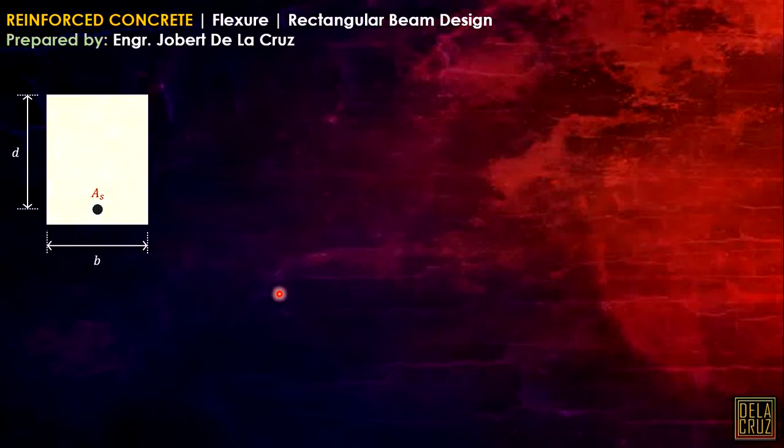Okay, so slight recap. We have this beam, we have this effective depth, and we have the beam dimension B, and we have this area of steel bars here. So what's the principle here? The beam will be having an effective compression block, this one, and the portion below this is the tensile part of the beam.

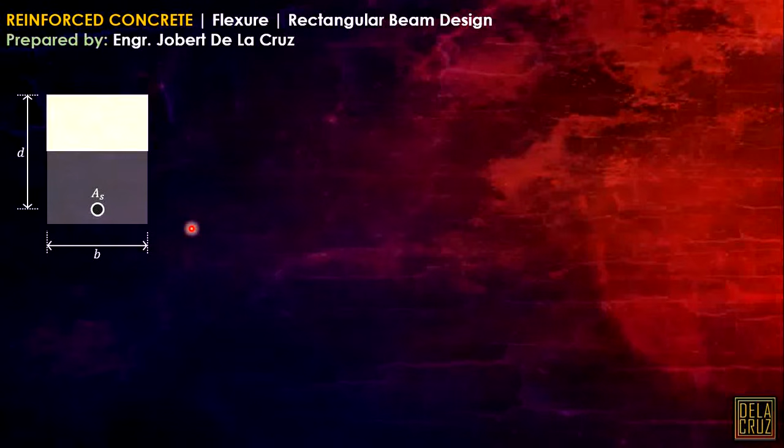And we know that the concrete is weak in tension and strong in compression. So in the code, it's assumed that the tension side of the beam is neglected in designing. This is what's stated in the code. So looking at this at the longitudinal view.

We cut here, and according to the code, this is A, the depth of the compression block, and we have this depth that is the depth of the neutral axis from the extreme compression fiber, and these are the notations we will be using. Of course, this is from the code.

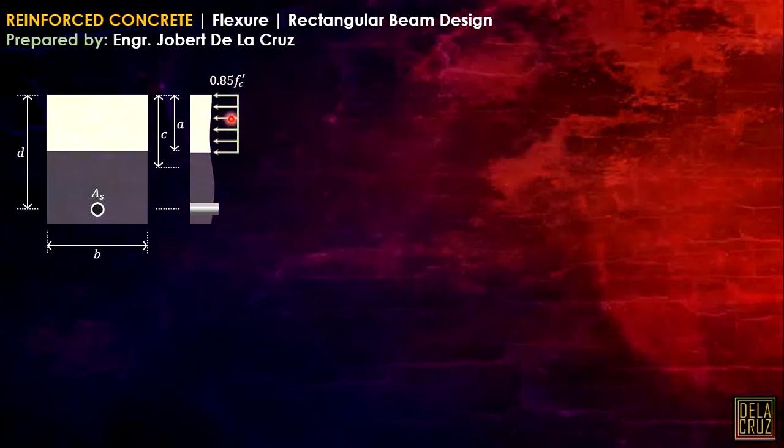The code also says that the effective stress in the compression block is 0.85 of Fc prime. And of course, if we have a stress, we will be having a resultant force here, and that is just stress times area. Let's denote that as C, the compression of the concrete. That is the force, the force is equal to stress times area.

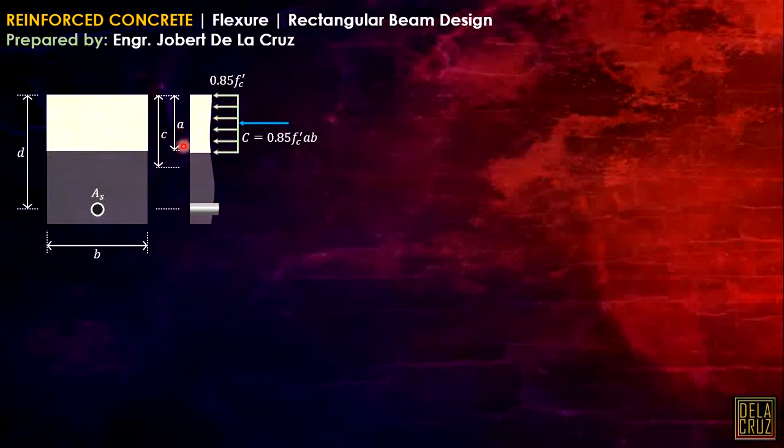Take note that our stress here is 0.85, and our area here is this one, the compression block, that is A times B. This is our compression block, so this is our effective area there.

Now, to account for this, this accounts for the tension bar here, the same thing applies. We will denote this as T, and take note that is the force, and again that is stress, Fs times area. For steel, we call the stress Fs, times the area of the steel bar.

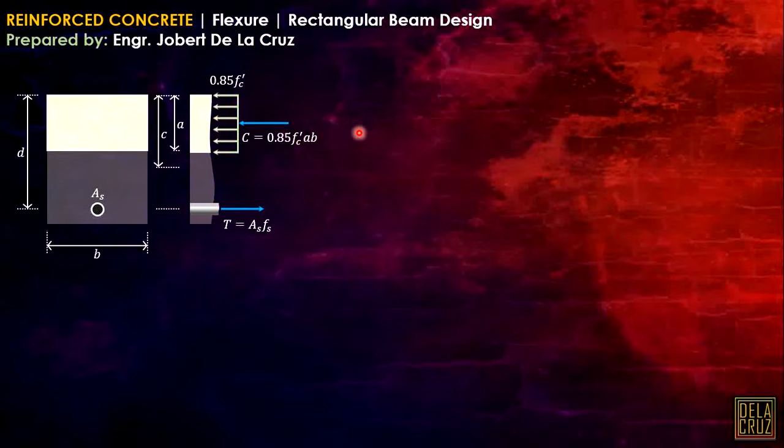So this one, C and T should be equal to maintain equilibrium. Okay, now, let's have this one.

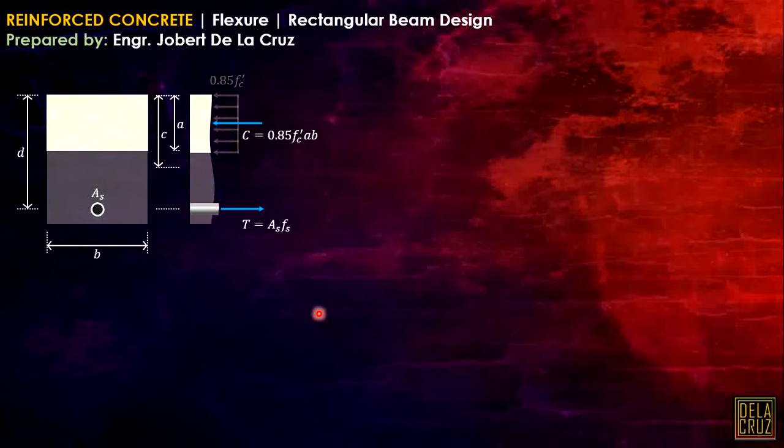So what's our main objective in designing a beam for flexure? Take note, this is A over 2, because our resultant force here, considering that this is a rectangular stress or uniformly distributed stress, this resultant force will act at the center here, of course.

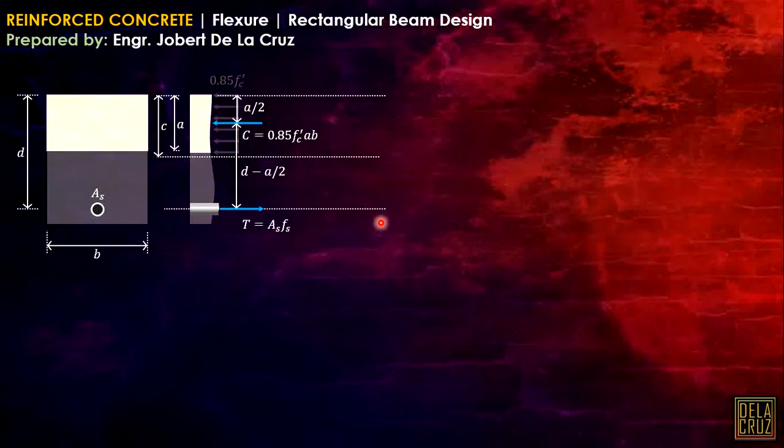Now let's do the strain diagram. These are the basics and fundamentals we need to know so we don't get lost in concrete design. We don't need to memorize formulas. According to the code, the maximum strain in the concrete is assumed to be 0.003.

And let's call that epsilon T, the strain of the steel bars, the tension steel bar. This is what's used in the NSCP code, epsilon T. And take note that strain is equal to

stress over the Young's modulus of elasticity. This is from Hooke's law. From Hooke's law, stress is equal to E times strain. So we just rearrange this to become like this.

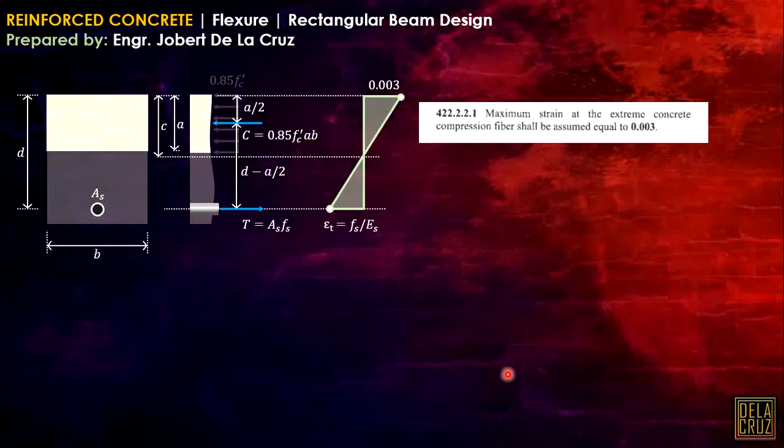That's its capacity. So by ratio and proportion, cutting this, using this strain diagram, take note that this is C, that is just this, and what remains here is, of course, D minus C. Again, by ratio and proportion, and using Young's modulus of elasticity of steel as 200,000 megapascal, we have this: 0.003 is to C as epsilon T, or that is Fs over Es.

Okay, epsilon T over Fs. So diretso ko na lang dito sa ibaba, divided by D minus C. Okay, so that's why we can derive the formula dito for the Fs. This is just the relationship between the stress of the steel and the stress in the concrete, or the strain of the steel and the strain of the concrete.

Ito yung formula na pinaka importante, no? Hindi naman pinaka importante, but basic talaga dapat na at least ma-memorize natin. Okay, so after this, in strength design, Fs should not be greater than Fy. Kasi kung gagamitin natin yung sumobra sa Fy, meaning mag-yield na yung steel natin.

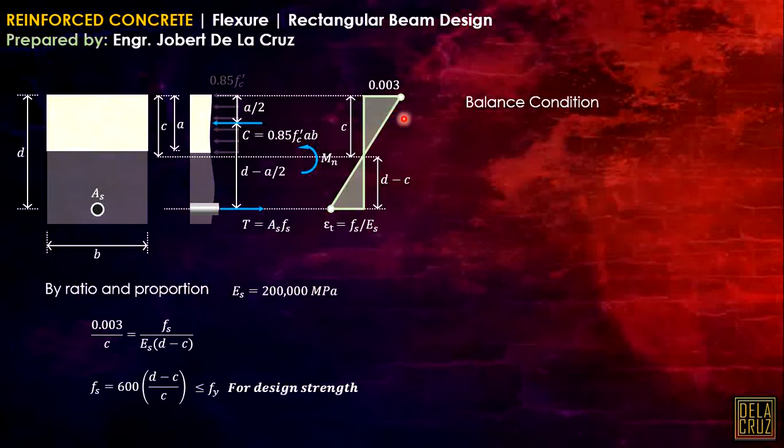Now, let's have balance condition naman. Ano yung principle ng balance condition? So ganito yan. Sa balance condition kasi, dapat yung concrete and yung steel, sabay silang mag-yield. Kumbaga, sabay silang aabot sa pinaka-yielding point nila. Yan yung principle dito. So the same pa rin, gagamitin natin to, yung strain diagram.

Okay, take note, no? The same, ito. So by equating, by using ratio and proportion, we can derive this formula. That is 600D over 600 plus Fy. This is just from this ratio and proportion, as you can see. Cross multiply this. Basta you can go on that lang. Basta this is from this strain diagram.

And using this strain diagram, dapat yung Fs mo is Fy. Kasi nga, balance condition, dapat umabot silang dalawa sa yielding point nila. So this will be Fy dito in balance condition. And you can derive this formula.

Okay, now, balance steel ratio for rectangular section. Again, this is for rectangular cross section. So deriving the formula, the same, we will equate the compression and tension. Ito pa rin yun: 0.85, but we will denote A here as A sub B or A balance. And equate this to AS Fy na. Since balance man, dapat mag-yield yung concrete and mag-yield yung steel natin.

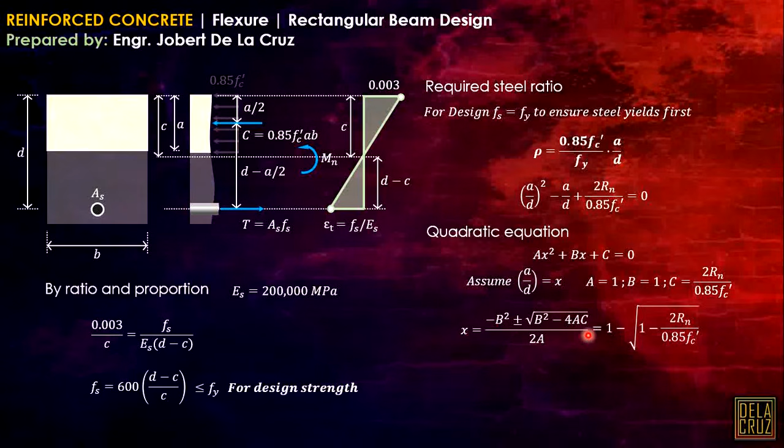Take note that we assumed x as A over D, so this whole term here is just A over D. Then we substitute this in, and it gives us this formula.

The required steel ratio when designing a rectangular beam. So as you can see, we derived rho balanced and the required steel ratio from the rectangular section only. So don't misinterpret this — this is only for rectangular cross section.

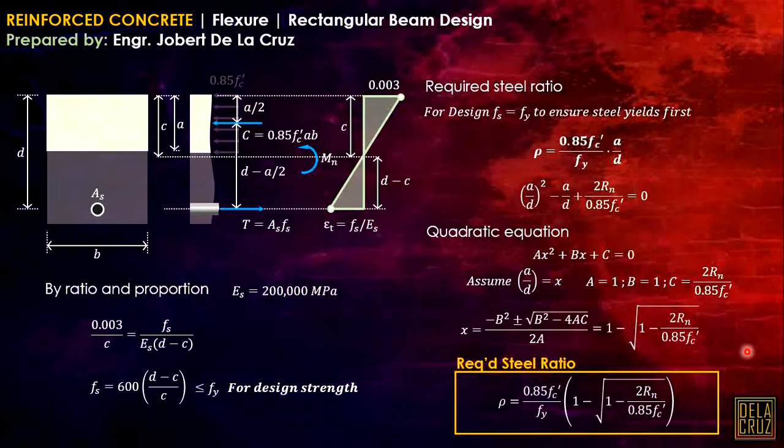Now let's have the boundary for singly and doubly reinforced condition. So first, if designing a beam, we have the factored moment.

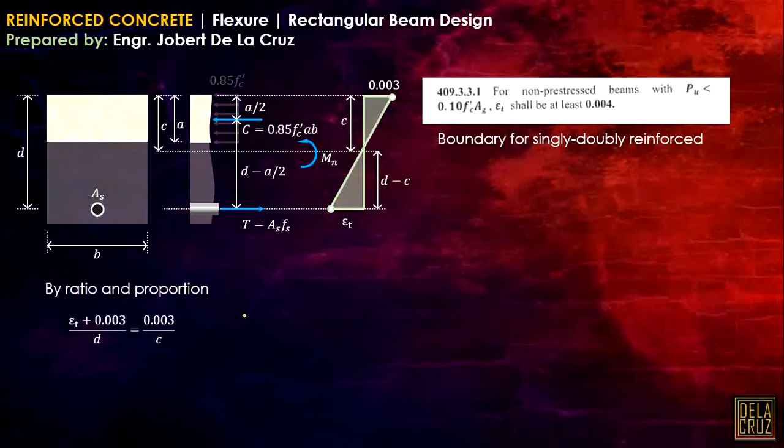Can you see that? The big triangle, this one.

Okay, this one, the whole triangle, that is epsilon t plus 0.003 is to the total depth. Take note, this is the total depth. That equals 0.003, considering this small triangle, 0.003 is to the C. Now we can rearrange this, expressing epsilon t into D and C.

Just rearranging the algebra. Now, using this code, it says that epsilon t should not be lesser than 0.004, or we can mathematically express it as epsilon t should be greater than or equal to 0.004. Now we will substitute this epsilon t into this inequality.

Using that, it will be like that. Now we will rearrange this, calculating the C expressing into D, and it will give us 3/7 of D, and I will call this C limit. I will not call this C maximum because the code doesn't really say maximum. That's what we will use as the maximum boundary. I will just call this the limiting C.

So if we have this C, what do we do? Using this formula, this is what I showed earlier, the general formula for calculating the steel ratio, that is C over D, or we can express this as A over D, then just cancel out beta 1. So in this case, we'll use C over D.

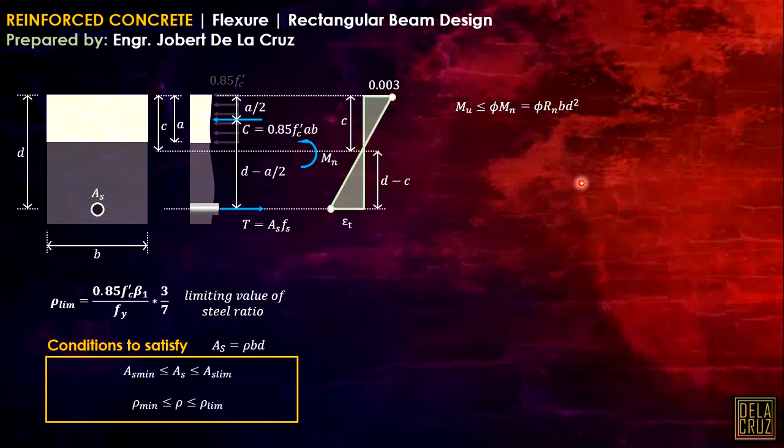Take note, we can express this into phi Rn B D squared when designing a rectangular beam. Take note, this is for rectangular beams only. Now, according to this section in the table 421.2.2 of the NSCP.

Now look at this. In designing, first we want to know the reduction factor here. We should have a reduction factor there. Now, unlike in 2001, where the reduction factor for flexure is always 0.9, in NSCP 2010 or 2015, there is now a condition.

Here's what it says: epsilon T, when epsilon T will not exceed epsilon Ty, and epsilon Ty is just Fy over Es. Take note, we use 0.004 as epsilon T here, so that will be in this region, since epsilon T is lesser than 0.005. This will be in this region. And actually, the 0.004 strain corresponds to Fs equals 800 MPa.

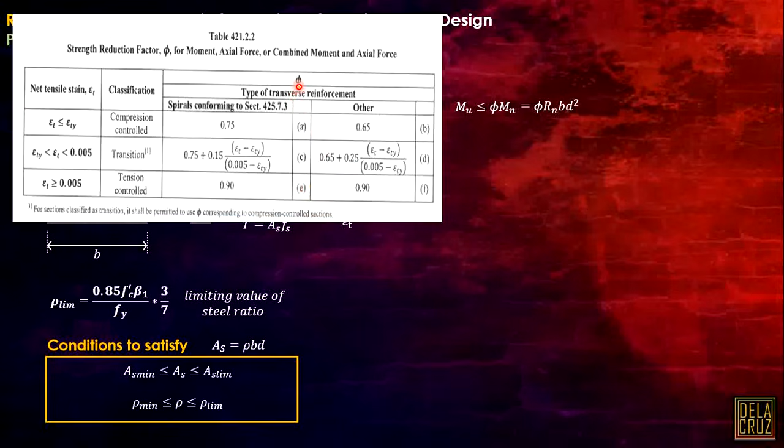Now, according to this region, the reduction factor phi, take note this is phi, equals this formula. Now look at this, we can actually draw this into a graphical representation. Here it is. This represents epsilon T, and this represents phi. And this is epsilon Ty, this represents Fy. The strain 0.004 represents 800 megapascal.

Ito yung 0.005, which is this one. The tension control represents 1000 megapascal. And ito yung varying formula na yan.

Okay, that is the y. Diba? If this is the y and this is the x axis, this is just the y as a function of x. So this formula is derived dito. And if using this, as you can see, kumbaga, if magda-design tayo, we have the factored moment, dapat we need to secure our reduction factor.

Now, ito yung sinasabi ko. If gagamitin natin yung 0.004 as a boundary, meaning yung phi natin dito is correspond dapat dito. Okay, so our reduction factor here will be this one. Hindi natin magagamit yung 0.9 since ito na yung gagamitin nating boundary talaga. Pag ito yung gagamitin natin.

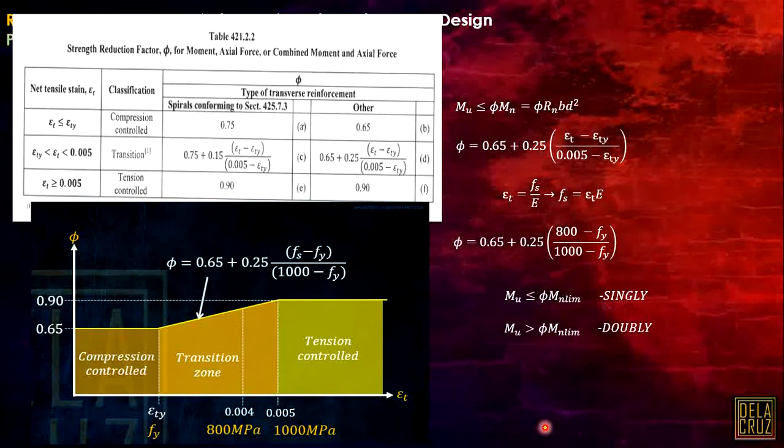Yan yung pinaka-objective natin dito. Okay, so ito yung isang boundary condition. Again, pwede yung una nating pinakita, but ito talaga yung pinaka-advisable as what the ASEP using. Ito yung ginagamit ng ASEP. Using this strain, epsilon t should be greater than 0.005, meaning that is in tension controlled.

So again, we have this formula relating epsilon t to d over c. So we have this, and rearranging that, it will give us this c. Let's call that c for tension controlled, ct. Ito yung gagamitin nating boundary, 3/8 d. And that is the limiting value of c.

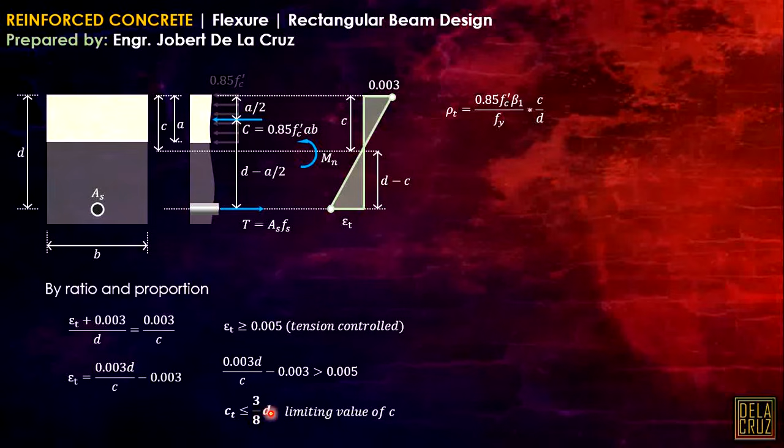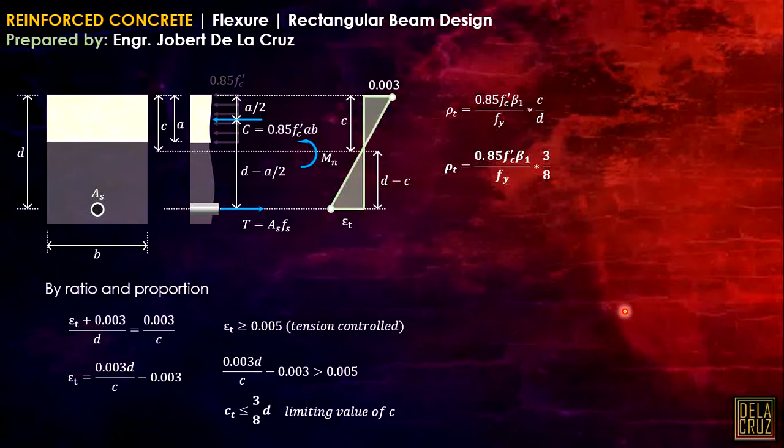So again, we have this formula, yung na-derive natin kanina. Then, as you can see, we will cross-multiply this d dito, and it will give us the ratio of c over d as 3/8. So, substitute, this will be the formula of the boundary steel ratio natin. So, using this as the limit of steel ratio for tension controlled, ito talaga yung gagamitin natin.

Pinakita ko lang yung kanina para at least may knowledge kayo. Bakit ito yung bakit kasi kadalasan may debate talaga dito ano yung gagamitin as boundary. Well, as I have learned talaga that the Structural Engineers of the Philippines, the association nila, ginagamit nila is 0.005. Okay, so kaya ito talaga yung gagamitin natin as the boundary.

So anyways, ipapakita ko sa inyo in our sample problems, gagamitin natin yung 0.004 na strain, and gagamitin natin yung 0.005. So if you are first timer of this code, medyo malilito ka talaga. But anyways, ipapakita ko yung step by step design in designing a rectangular beam. Wag kayong mag-alala. Ito lang talaga yung pinaka-concept.

Okay, again, let's go back. We have AS is equals to rho BD, and ito yung criteria na dapat nating i-satisfy. MU should not exceed the design moment capacity of the beam. And again, we will express that is into RnBD squared for rectangular beams.